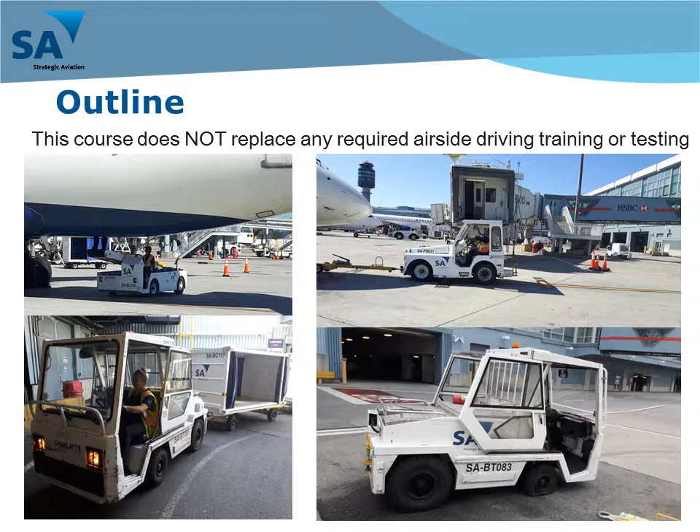Module 1, Introduction. This online course will provide you with a general overview of airside driving. Please note that this course does not replace any required airside driving training or testing that is required at your base. You will take a final quiz at the end of this training and must receive a score of at least 80% in order to pass.

There are a total of 5 modules in this course, including an introduction and definitions, safety surrounding airside driving, rules and regulations, information on how you can obtain your permit, and finally, a review of what you've learned. Keep in mind that each module will be followed by a short quiz, which you can retake as many times as you need to.

You should have seen our safety policy in your employee handbook and mentioned in other training courses. This safety policy is especially important when it comes to driving on the ramp, which can potentially be one of the most hazardous activities you may perform while at work. Reporting any safety concerns you have, wearing your PPE, obeying all of the rules and regulations for airside driving, and stopping whenever you're in doubt are just a few of the ways you can be a safety ambassador while driving airside at work.

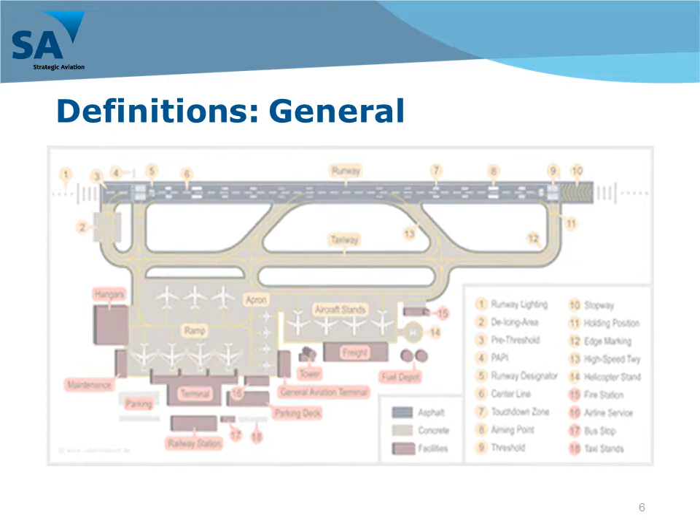Next, we will review some of the terminology you will hear while learning about airside driving. There are many different parts of the airport, and it is common that the term airport can be replaced for aerodrome. Aerodrome can mean any area of land or water officially used for airplanes to take off, land, or be serviced, but it can also refer to the buildings used for these purposes.

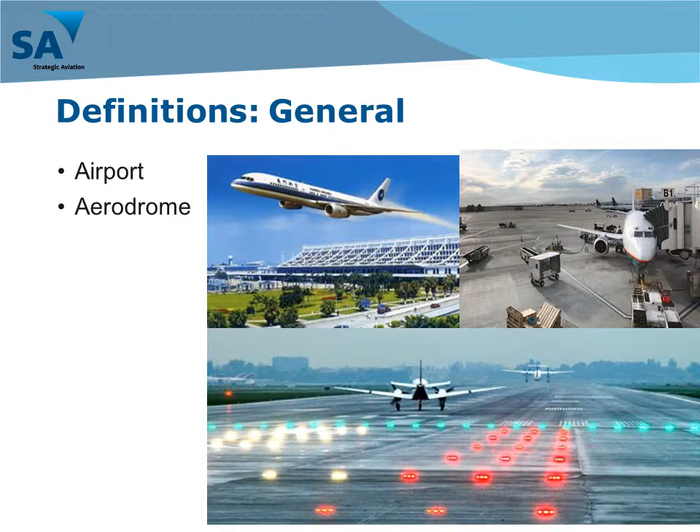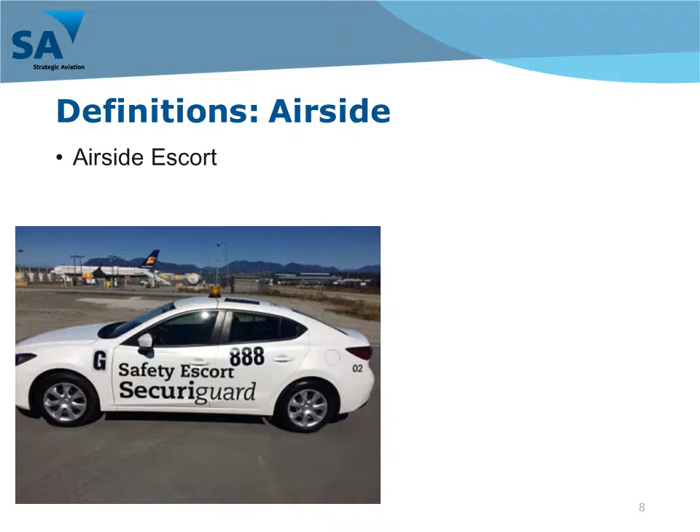All airports can be divided into 2 parts, airside and landside. Airside is that area beyond security checks and passport control, which is used by the aircraft to load, unload, take off, and land. An airside escort is someone who is authorized to escort others into the restricted areas of the airport. Air traffic control is usually located in a tower overlooking the airport, as this is where aircraft and vehicle movements are controlled from.

The Airside Vehicle Operator's Permit, or AVOP, is what you will be working towards. This is similar to a driver's license, but it allows you to drive airside in certain areas of the airport. There may be different types of AVOPs at your location, so please ask your supervisor for more information about the type of AVOP you will obtain at your base.

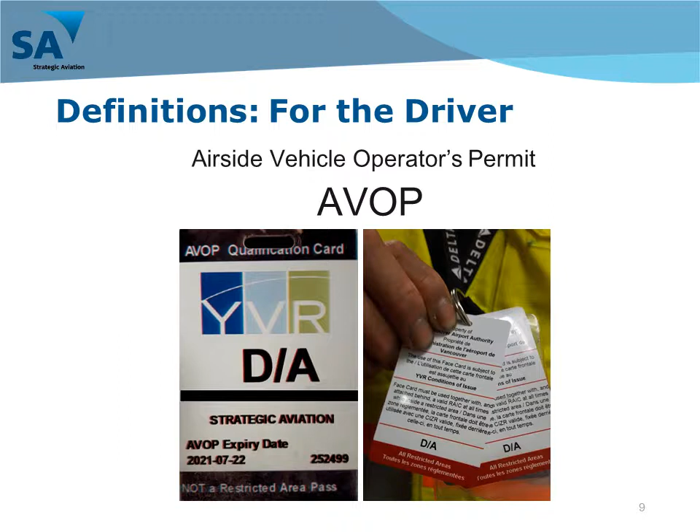Prerequisites for obtaining an AVOP are having a valid restricted area identification card, as well as having a valid driver's license.

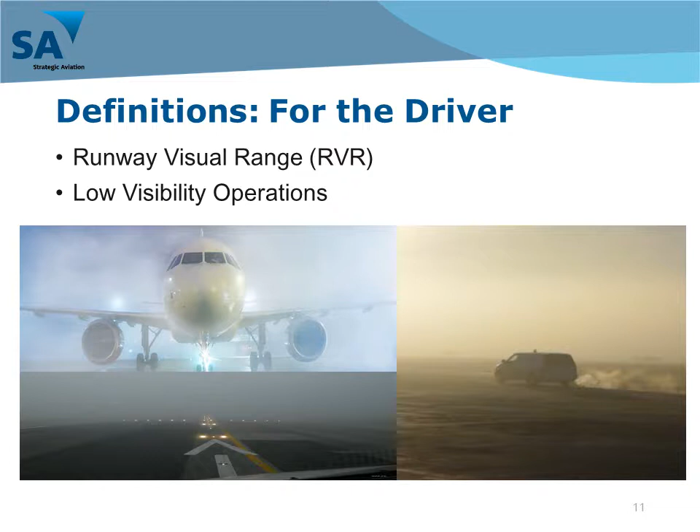Runway visual range, or RVR, is a term used to express how far a pilot can see down the runway, usually given in feet or meters. When the visibility is very low, the airport may adjust operations for reduced visibility operations or low visibility operations by reducing or even stopping work airside until the visibility improves.

The operational stand is a location on the apron where the planes are parked, serviced, and loaded and unloaded. There may be ramp workers, equipment, and other vehicles in this area that you must be aware of when driving on the ramp.

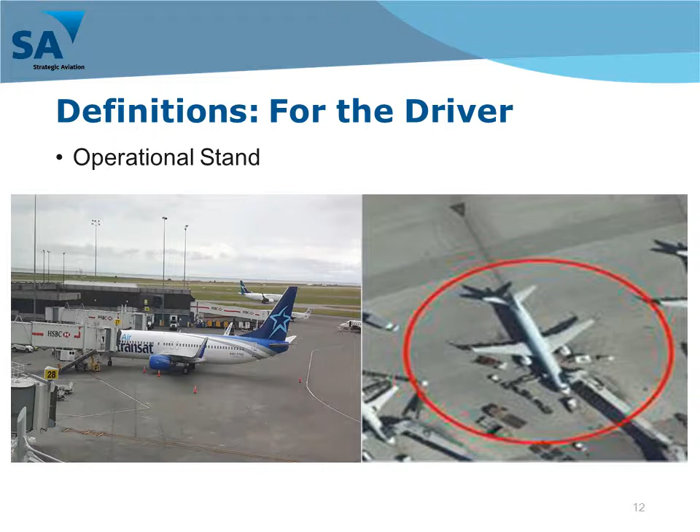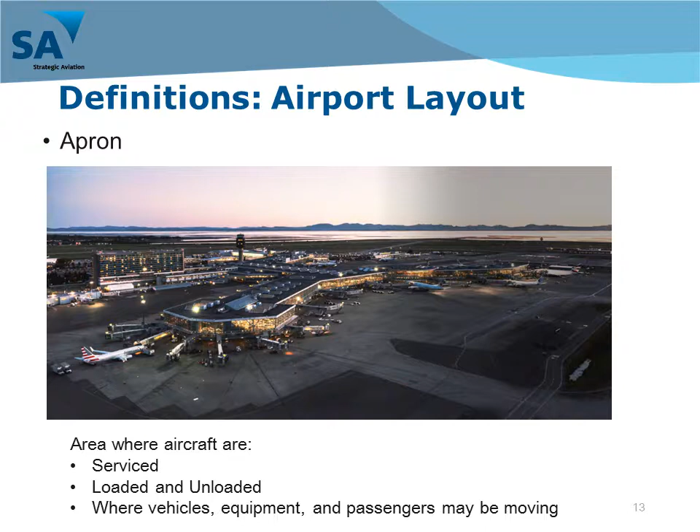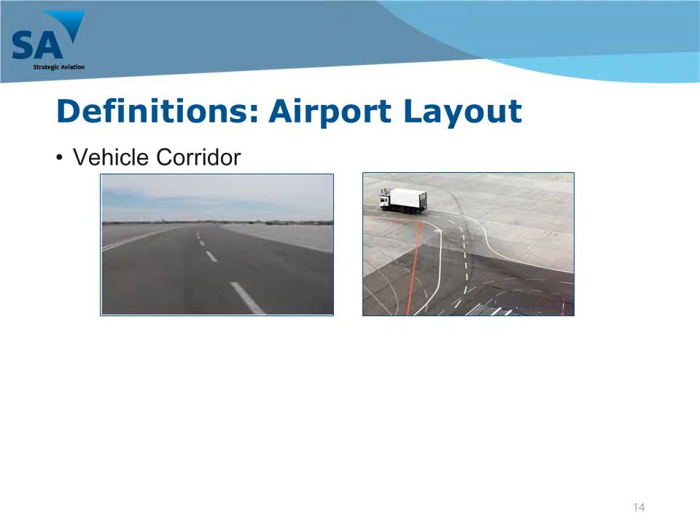The apron is the area of the airport where aircraft are serviced, loaded and unloaded, and also where many vehicles, equipment, and passengers may be moving around between the terminal, the aircraft, and possibly other parts of the airport. You will see painted lines on the apron which will help you identify the vehicle corridor, where it is safe for vehicles to travel, just like on a regular road. You will receive base-specific training for those areas before you obtain your AVOP.

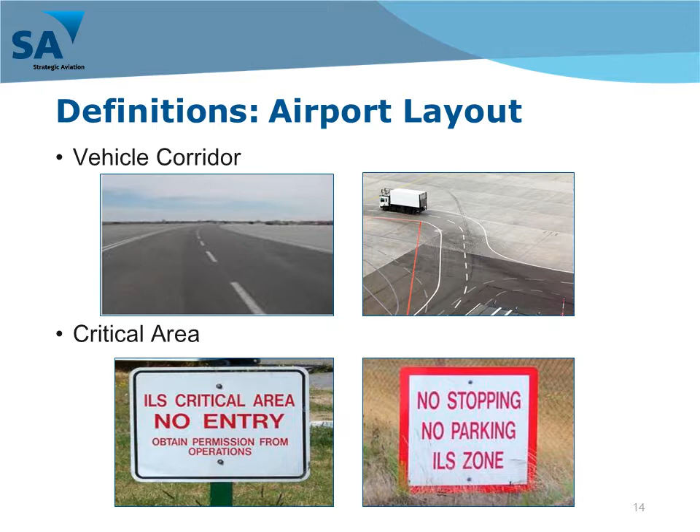The critical area is where the navigation aids, communications equipment, and other sensitive equipment operate. It is crucial that this area remains clear to avoid any signal interference. Foreign object debris, or FOD, is any small objects or litter on the ramp which could possibly cause damage to an aircraft or to you or your colleagues working airside.

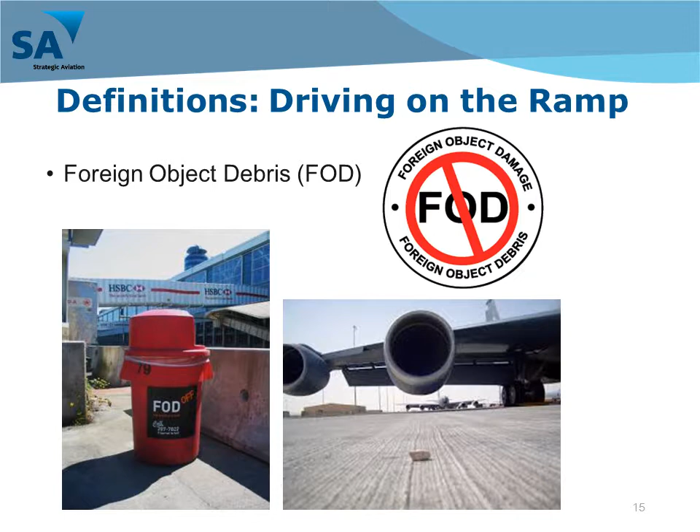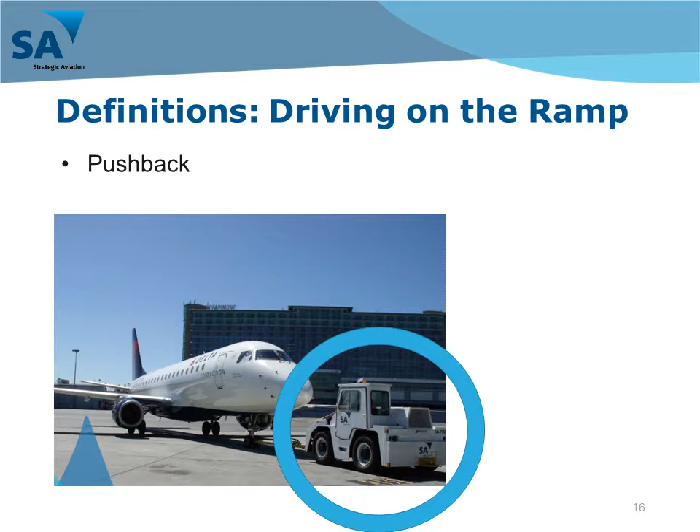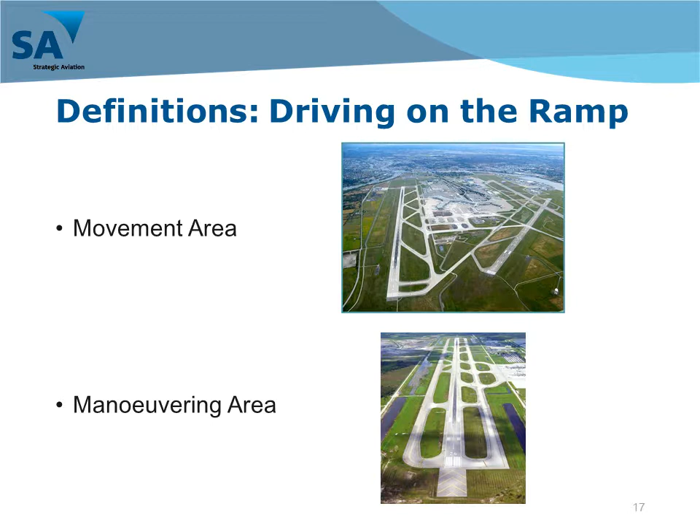The term pushback is used to describe the airside operation where a vehicle, called a tug, moves an aircraft back from an operational stand to the area where it will start its engines. The movement area is used to describe all of the controlled and uncontrolled areas an aircraft may move in the aerodrome. The maneuvering area is a portion of the movement area used for takeoff and landing, such as runways and taxiways, and are usually controlled areas.

The following are some common rules for you to follow as a driver airside. A driver cannot enter a controlled area without permission or clearance from ground control. A controlled taxiway is similar to a controlled area, as clearance from ground control must be obtained, and often a specific type of AVOP must be held by the driver of any vehicle to enter.

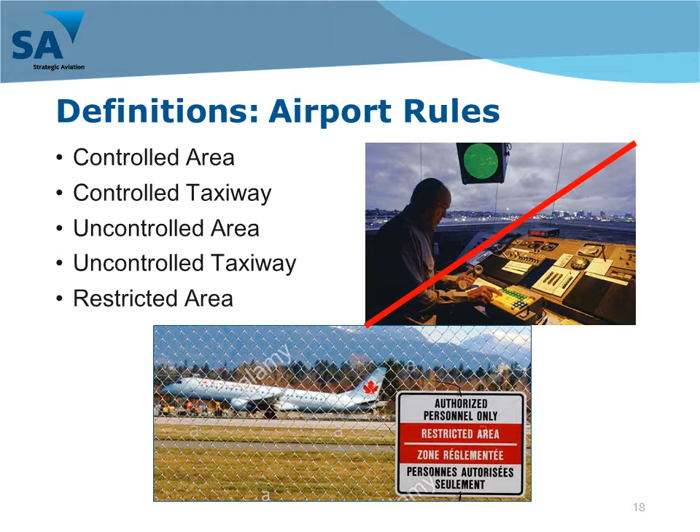Any uncontrolled areas or taxiways, on the other hand, may be used without clearance from ground control. However, an aircraft will always have the right-of-way. Any restricted areas at your base will be clearly marked with a sign or security gate, and a visible badge must be worn at all times, or else an individual would have to be accompanied by an airside escort.

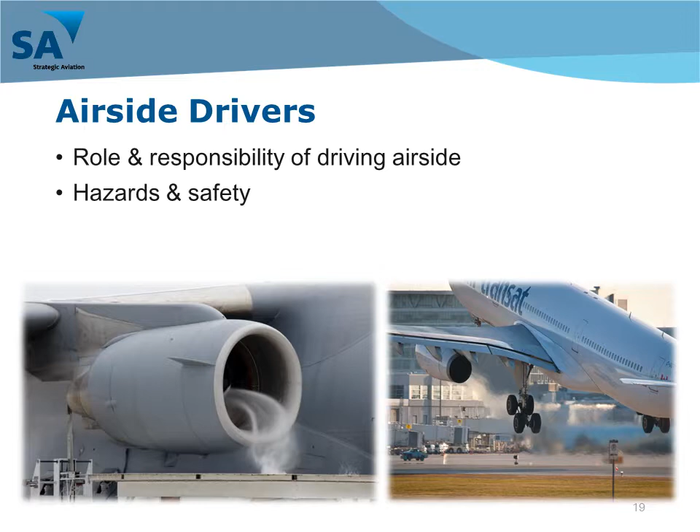While you may be used to driving on the roads and highways in your city or town, driving airside is a very different experience. The remainder of this course will review your roles and responsibilities as an airside driver, the specific hazards and safety considerations to be aware of when driving airside, as well as general rules and regulations.

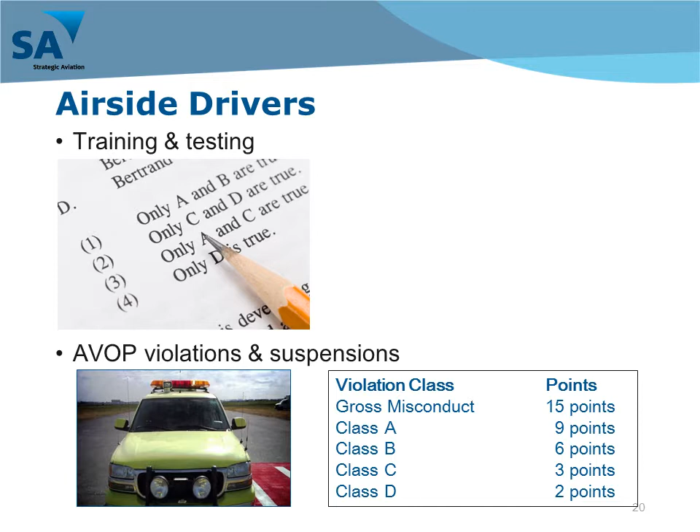Every employee will also have to take a test to confirm that they can drive airside. While every airport has a different test structure, we will provide an overview of the general types of tests you may experience in Module 4, as well as what happens if you do not follow the rules and regulations of your AVOP. To finish this module, we would just like to remind you that this online course covers only a general overview of the policies and practices for driving airside.

Every airport authority will have different rules and regulations, which you must be aware of before you obtain your AVOP and begin driving airside. It is a serious responsibility to hold and retain an AVOP, and at SA Holdings, we treat this responsibility with all the respect it deserves. If you have any questions about driving airside, even if you already have an AVOP, please talk to your supervisor or manager. When you are ready, please continue to the quiz.